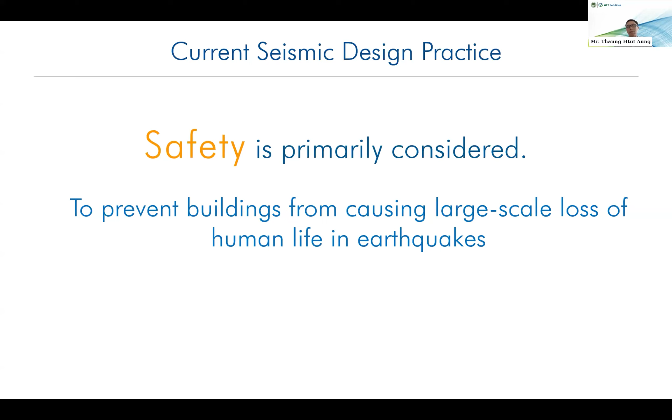In the current seismic design approaches, we consider public safety as a primary consideration. When we design the buildings, for normal buildings, we design them to remain elastic or have very little damage under frequent earthquakes. But under extreme earthquake, the buildings should not collapse, and we design those buildings to have low probability of collapse under extreme earthquakes. So our primary concern is mainly on safety, but we do not consider the recovery of the functionality of the building. It is not well addressed.

All of you know two weeks ago there was an earthquake in Myanmar, magnitude 7.7, which is very strong, with very severe damage and casualties in Myanmar. I am from Myanmar. That earthquake also affected the tall buildings in Bangkok. Because of the soft soil basin effect, although the epicenter is about 1,000 kilometers far from Bangkok, we also felt the ground shaking, especially people who stay in tall buildings.

Due to that ground shaking in Bangkok, most of the damages in the tall buildings are not structural damage, but non-structural damage. Very few structural damage in a few buildings, so we can say that most of the buildings are safe. But due to the non-structural damage, major damages are in the partition walls, brick walls, and also damage in the ceiling fall down, and in some buildings, elevators are stopped. So these kinds of damages affect the reoccupancy of the residents.

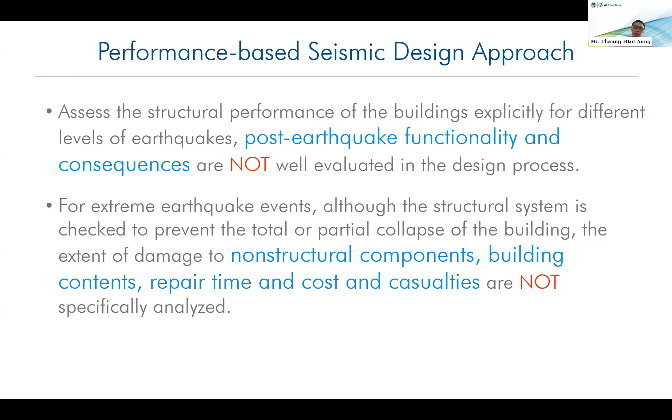In the current performance-based seismic design approach, we check the structural performance of the building explicitly for different levels of earthquakes, like frequent earthquake with a 43-year return period, and maximum considered earthquake with a 2,475-year return period, for different structural performance levels. But the post-earthquake functionality is not well addressed. We check the collapse prevention performance level under extreme earthquakes using nonlinear response history analysis, but damage in the non-structural components, repair time, costs, and casualties are not analyzed.

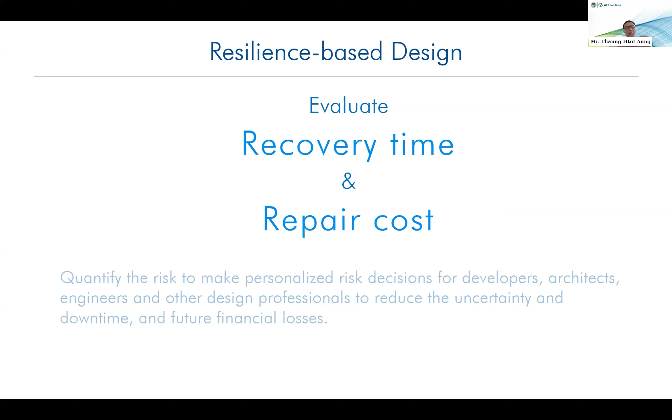So in resilience-based design, we have to evaluate the recovery time and also the repair cost. Based on that assessment, we can quantify the risk in a more detailed manner, and we can make well-informed risk decisions from the different parties: developers, architects, structural consultants, MEP consultants. So all the stakeholders can make decisions based on that information, considering the uncertainty, downtime, and financial losses.

So in this presentation, we will present the process based on the FEMA P58 guidelines. We are focusing on the performance resilience-based assessment of the individual building.

So when we do the seismic design, first we have to define the seismic input. If we do performance-based seismic design, we conduct the site-specific probabilistic seismic hazard assessment by the PSHA consultant, and they provide us the service level earthquake response spectrum information, maximum considered earthquake response spectrum, and ground motions.

So normally for the performance-based seismic design, we conduct the initial elastic design using the wind loading and service level earthquake loading. So in this design stage, we consider the design to remain elastic. So under ultimate wind and service level earthquake, the building will respond essentially elastic.

So in response spectrum analysis, we do not reduce the seismic forces by response modification coefficients, the R factor. We just use the scale factor 9.81 if we use SI units, and conduct the elastic design. After that, we get the reinforcement information for the structural components in the lateral load resisting system, for example vertical reinforcement in the shear walls, longitudinal reinforcement in the beams, coupling beams, and so on.

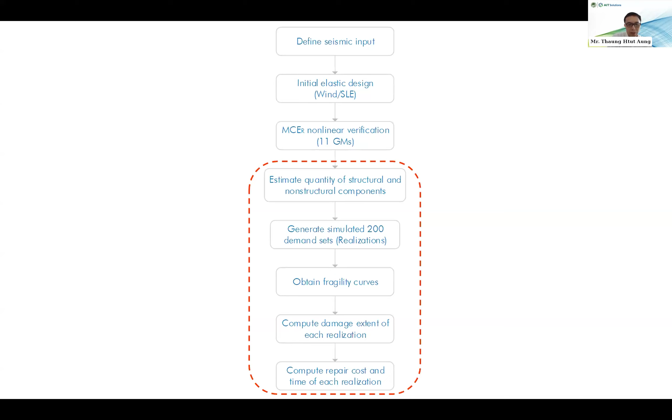Then we have to get the fragility curves of the non-structural components as well as the structural components. Those fragility curves are based on laboratory test results. Then we compute the damage extent of each realization, each ground motion result. Then we compute the repair cost and repair time for each analysis result.

So in the assessment, there are mainly three types. The first one is intensity-based assessment. In that assessment, we evaluate the performance at a selected response spectrum. For example, you want to check the design earthquake response spectrum assessment for the resilience-based assessment, checking the non-structural components damage or structural components damage. So you just use that design earthquake response spectrum as a seismic input and assess the performance.

The second one is scenario-based. That one is based on the user-selected earthquake magnitude and distance. It's like a probabilistic seismic hazard assessment input, so it will consider the uncertainty and intensity of earthquakes around the site. For example, if there are 3-4 active faults near the site, in that case you can consider all the possible scenarios from those faults.

The last one is the time-based assessment, which is the most computationally intensive.

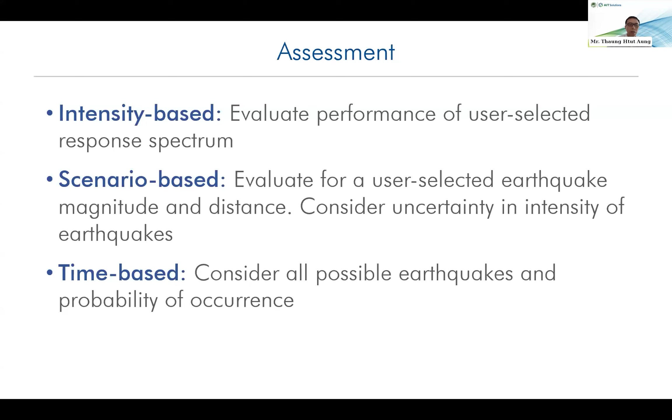This assessment considers all possible earthquakes and their probability of occurrence based on the time you want to consider. For example, if you want to check the performance of the building for 50 years from now, within that 50 years, all possible earthquake scenarios with different intensities and probabilities of occurrence are considered. It will consider 43-year return period, 500-year return period, and so on. So all possible scenarios are considered in the time-based assessment.

So this is just an example. When we assess resilience-based design, we have to consider the structural components - beams, shear walls, columns, slabs. For non-structural components - partition walls, ceilings, piping, HVAC system, fire sprinkler system - and it can also consider casualties. But here I will not focus on casualties. I will focus on the structural and non-structural components.

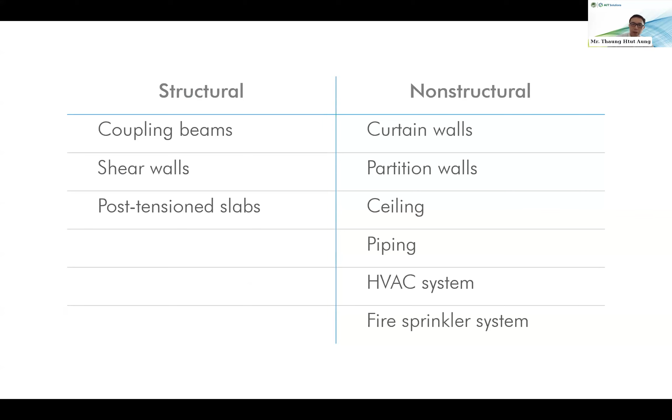So when we do the finite element modeling, if we start with the performance-based assessment, we have to create elastic models for wind and service level earthquake, check the responses, and design the building's initial reinforcement using those wind and SLE earthquake demands. Then we create the nonlinear model using the long reinforcement information, and carry out the time history analysis.

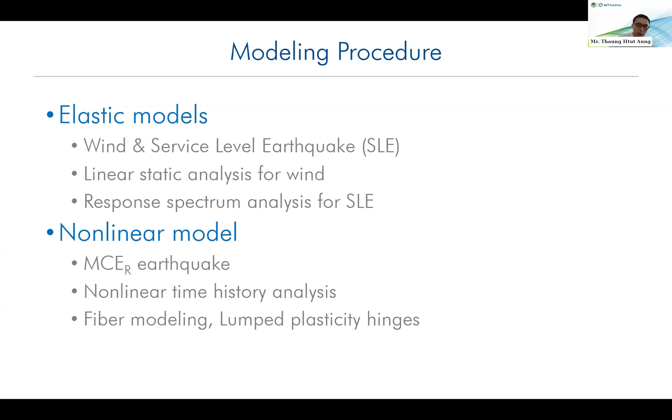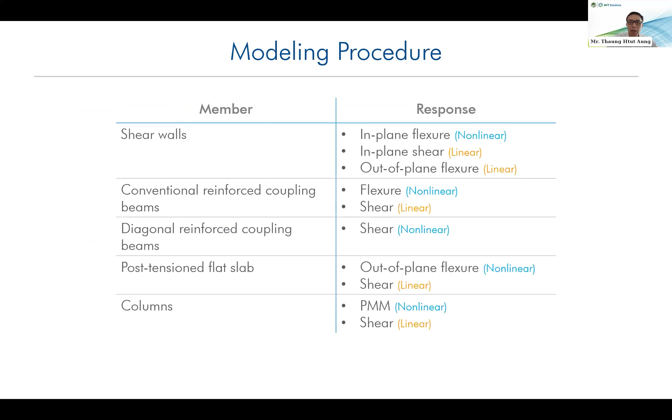So in the modeling, we consider the nonlinear behavior based on the actions. If it is a deformation-controlled action like ductile response, we consider it as nonlinear. But for brittle failures, we consider it as force-controlled and treat it as linear.

After that, we analyze the building for 11 ground motions and check the global responses and the local responses. So in terms of non-structural assessment, the global responses like story drifts and accelerations are important.

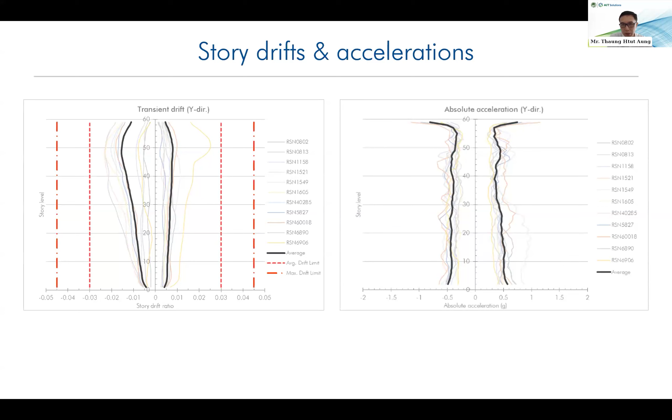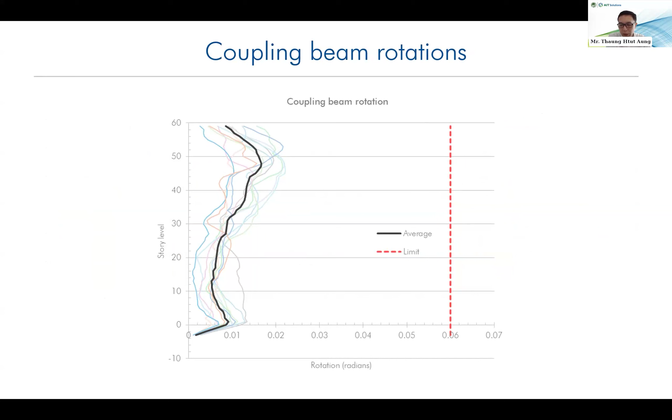Here are the local responses for the coupling beam rotation, one coupling beam rotation along the height. They are still within the limit of the collapse prevention performance level, but we cannot assess the damage from this.

So to check the structural and non-structural damages, we have to generate the realization demand sets from those 11 ground motions. We create 200 simulated demand sets. For example, we have the rotation of our coupling beam at level 22. We have 11 ground motion sets, so there will be 11 dots here. But using Monte Carlo simulation, we generate 200 rotation results without running the nonlinear time history analysis.

So we plot the rotation results of 200 ground motions. The x-axis represents the 200 results, let's say 200 ground motions, and the y-axis is the rotation results. So it is in the range of 0.01 radian to 0.03 radian.

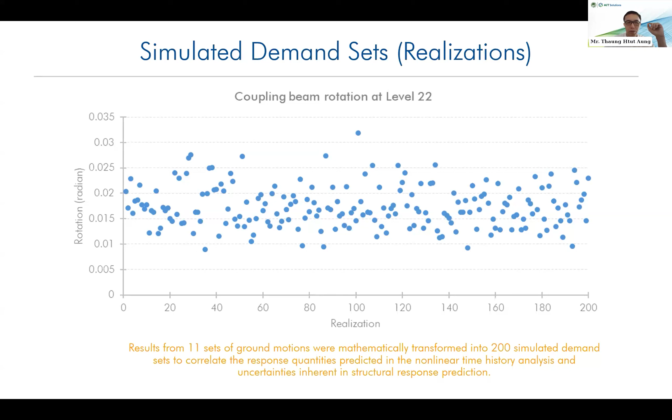Same thing, we have to plot for all other structural and non-structural components, for example shear wall rotation, or slab column connection rotations, and so on.

Then we have to check the damage using the fragility curves. This is one example of the fragility curve for the shear wall. There are other curves for non-structural components like partition walls, gypsum walls, and so on, so you have to use the corresponding fragility curve for that non-structural component.

Fragility curves show the probability of damage for the component with respect to the demand parameter. It may be the drift or it may be the acceleration.

For example, in this fragility curve for the shear wall, the x-axis is the story drift and the y-axis is the probability of damage. There are three types of damage state. Damage state 1 is just spalling of cover. Damage state 2 is larger, exposed longitudinal reinforcing. Damage state 3 is core concrete damage.

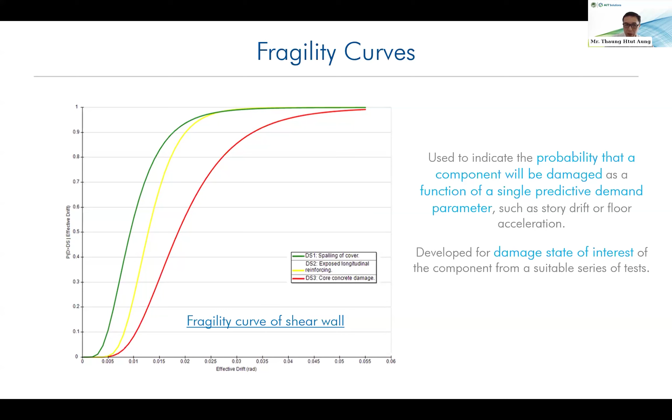So these three curves can be obtained from laboratory test results.

Then we have to check the damage assessment of each structural and non-structural component for each realization. So if we have one partition wall, we check its damage, for example based on the story drift at level 25. So we extract the story drift at level 25 for 200 realizations, and for each realization we check what the damage level is.

So we generate the realization using Monte Carlo simulation, and then we do random number generation using numbers between 1 and 100 to check the damage state.

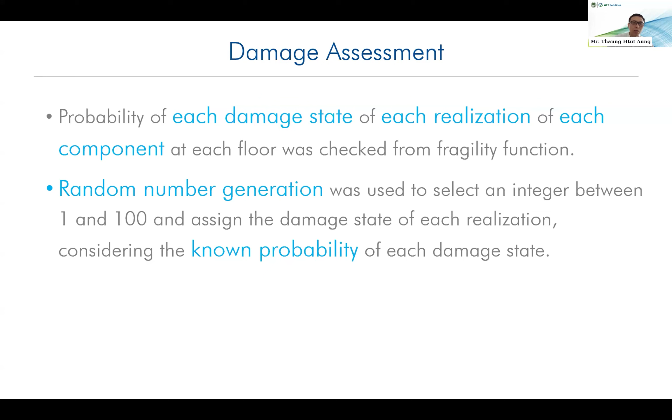So from the fragility curve we will know the probability. Here is the process: for example for the wall, we have 3 damage states. If the rotation of the wall, or for the partition wall the story drift ratio, is 0.01, we have to use that story drift ratio.

And the realization number is, let's say, 34 out of 200. So for that ratio, we check the probability. For damage state 1, the green one, the probability is 0.54. For damage state 2, the probability is 0.23 at the 0.01 ratio. And damage state 3 is 0.08.

So occurring of damage state 1 is 0.54 in this table, and occurring of damage state 2 is 0.23. So not occurring of damage state 1 is 1 minus 0.54, which is 0.46. Not occurring of damage state 2 is 1 minus 0.23, which is 0.77. And not occurring of damage state 3 is 1 minus 0.08, which is 0.92.

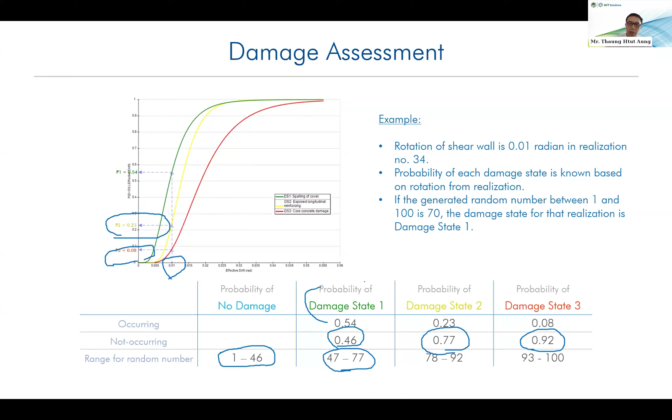So we have to check all the structural and non-structural components using that procedure. Then we have to calculate the repair cost, which again requires checking each realization and each damaged component.

Normally, repair costs are calculated as cost per unit of repair, using lower bound and upper bound quantities. If fewer quantities of components are damaged in the realization, the median repair cost will be high, similar to buying in bulk reducing the price, but buying few things increases the price. Based on that, we decide the median repair cost.

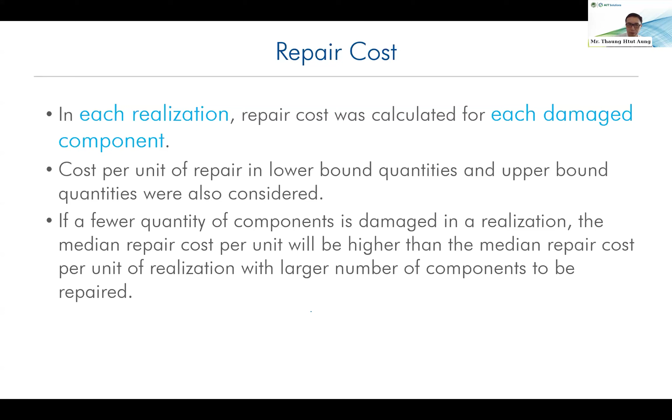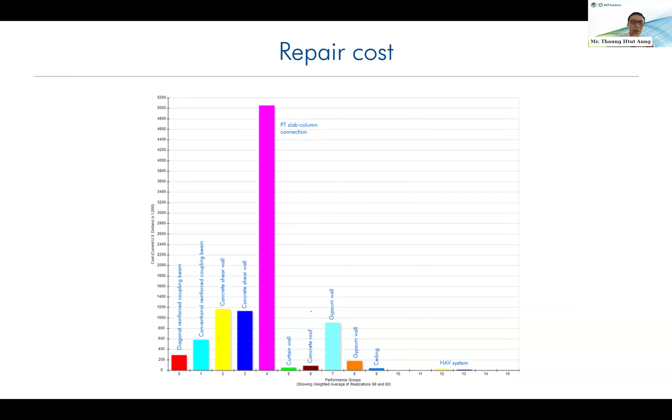Here, diagonal reinforced concrete coupling beams have a repair cost of about 200,000 US dollars, and so on. For the non-structural components in this assessment, the damage repair cost is less, but gypsum wall damage is also high. Then you can plot the repair cost in terms of realization, where the x-axis is the number of realizations up to 200, and the y-axis is the total repair cost.

So the total repair cost for the median, the 50% probability of exceedance in this building is about 9.5 million US dollars if we check at the 100 realization. So we can also see which group is contributing larger repair cost.

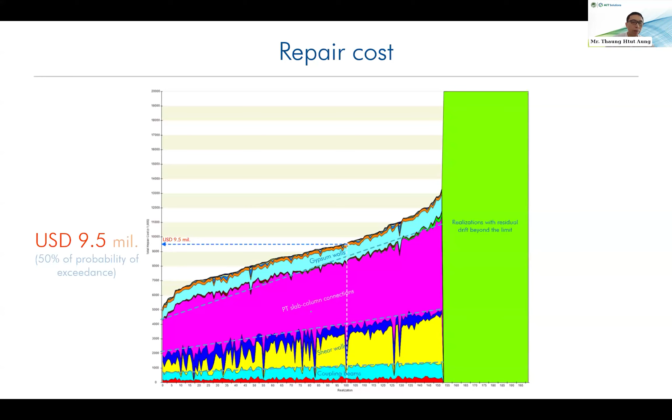But here you can see on the right side, there's a green area with realizations with residual drift beyond the limit. If the residual drift, the permanent drift of the building in those realizations are beyond the limit, we will not calculate the repair cost.

And also we have to calculate the repair time. Normally repair time in FEMA P58 procedure considers the labor factor. For example, labor factor is 80% of the total repair cost. So if repair cost is $100, the labor cost will be $80, based on that repair cost.

And then we have the labor rate. For example, labor rate is $50 per day or something like that. So the total repair cost is, let's say, $100,000. And from that $100,000, 80% is the labor cost. In that case, $80,000 will be the labor cost.

If we know the labor rate is $50 per day, we can calculate the total number of labor workers needed. Then we estimate how many people can accommodate in that building during the repair. For example, 100 laborers can accommodate, then we divide by the total number. In that case, we can calculate the total repair time to repair that building.

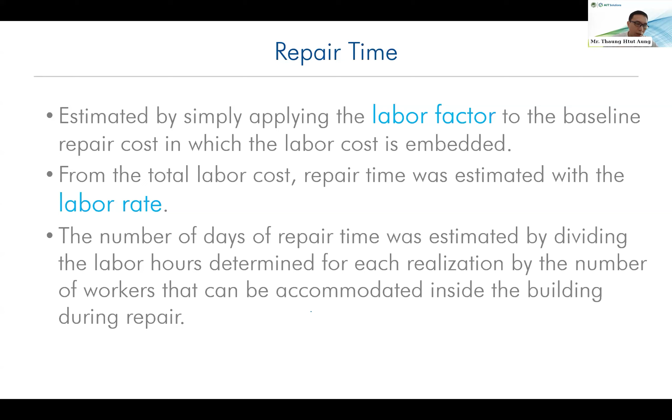Same thing for the fragility curves. Fragility curves that we get from the FEMA website are based on US standards and research. So if we have the fragility curve for the brick walls or partition walls based on local practice, it will be good to assess the damage.

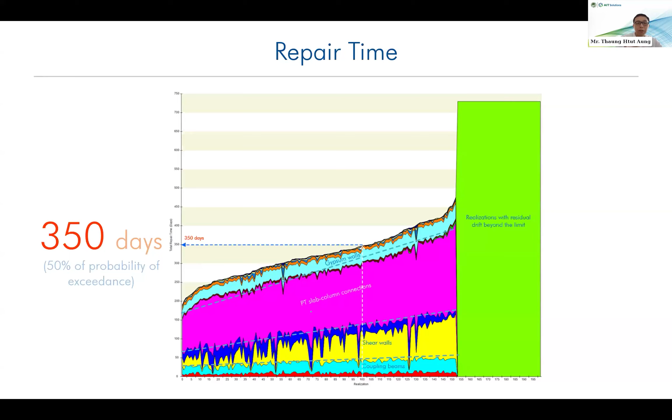So here is the repair time assessment. For this building, the repair time is about 1 year, which is at 50% probability of exceedance.

So the procedure that I presented is for individual building assessment. But in the future, the trend is codes are going toward community resilience, not only individual building resilience. They will consider the cluster of buildings, city level, and consider other infrastructure and lifeline systems.

So all the things will be considered in a holistic approach to check the resiliency. Those procedures are not mentioned in the building codes, but there are manuals of practice and guidelines in ASCE. So here are good MOPs and guidelines if you want to read more details.

So that's all for my part. My colleague Shabil will explain further detail about the time-based assessment, which is the most extensive process.

As Mr. Aung mentioned in his presentation, what we did was look at an individual building, and as Mr. Aung described, we look at a particular intensity for that building, an MCE level, for example, earthquake. And we ran 11 ground motions, got the local and global responses.

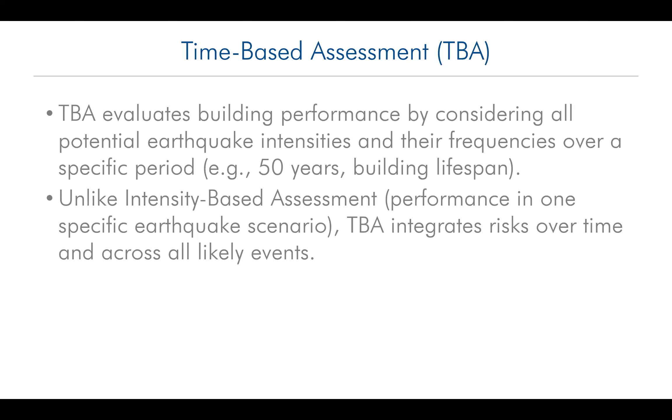Unlike a single event, now we are running the same approach, the P58 approach, but for different intensities. Why do we need to run this for different intensities? The reason is that we can now combine the information we're getting from all of those intensities and get different parameters, which will help the owners as well as insurance companies make financial decisions.

One of the key parameters which helps us make those decisions is what we call the average annual loss. Another key parameter is what we call the net present value. The slide in front of you is summarizing the time-based assessment process. It's exactly the same process as Mr. Aung defined in his part, but we just repeat it for multiple levels of intensities.

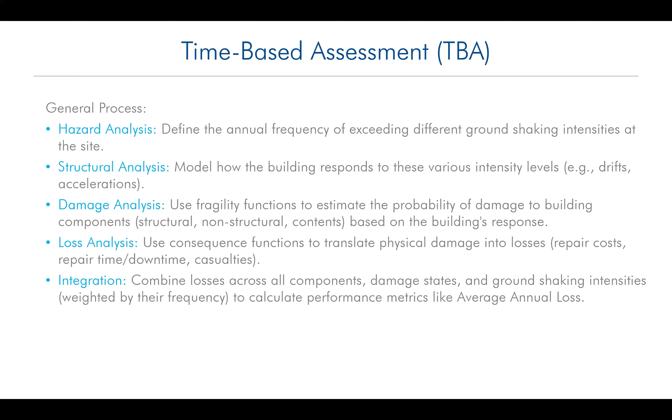For each level of intensity, we have a median cost associated, which has a 50% probability of exceedance if that event were to occur. Now, if we integrate all of those costs, we get what we call an average annual loss. What is that average annual loss? It's how much money, for example if I am an owner of a building, I'm expected to pay every year if earthquakes occur over the next 50 years.

How do we calculate that? Imagine you have a structure whose lifespan is 50 years. Every year there can be one or more earthquakes, but you just note down how much money you spent that year to repair your structure. Then you average it out for 50 years, and you'll know your average annual cost — you're averaging the cost you're paying to repair the structure every year.

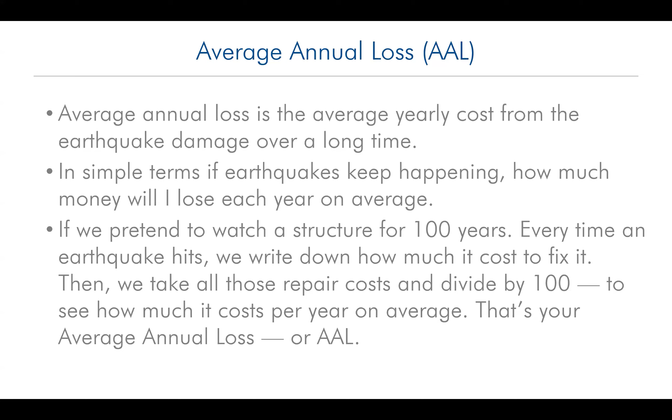This information you'll be able to get from the time-based assessment, because now we're not looking at a single intensity, but at a range of different intensities that might occur during the lifespan of a structure. Now you might ask, well, I know this average annual loss, it's a value, but how do I use it? What do I use it for?

Before I explain where you use it — the way you calculate this average annual loss is basically you sum up the median loss value, the cost you're expected to pay for different intensities of earthquake, and multiply that with the annual frequency of occurrence of that intensity of earthquake. Then you sum that value up, and you get your average annual loss.

So then how do you use that average annual loss? Imagine you're an insurance company and you want to know how much to charge the owner of a building for insurance premium to insure his structure against earthquake. If you know the average annual loss cost, you know how much you're expected to pay every year. The earthquake might not occur every year, but you're expected to pay that cost averaging out over, let's say, the next 50 years.

So if that is the cost, the insurance company has a base now. The insurance company knows most probably this is the amount I'm expected to pay every year for the next 50 years. And I'm going to charge the owner of the building more than the average annual loss. Why? Because the insurance company also has to cover its own expenses. They have staff they have to pay salaries for, and obviously they need profit margins and stuff like that.

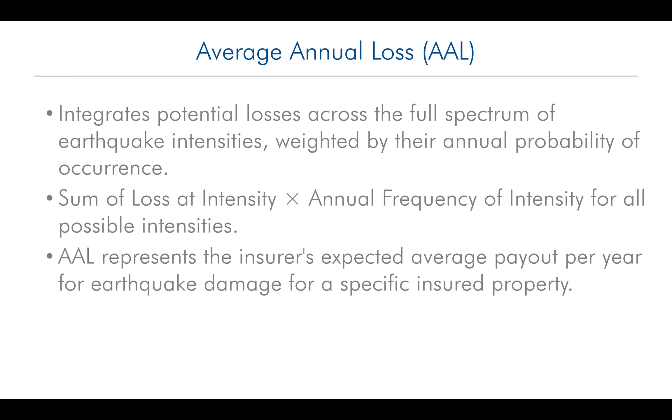And when you run the resilience-based design procedure, you actually know what kind of cost you're expecting to pay. You might also see how much the insurance company is charging you, and make your decision whether you want to buy that insurance or not, or whether that insurance is good enough, or whether you may be better off just paying for the repairs yourself. So this is very good information that owners as well as insurance companies can use to make informed financial decisions.

Another very important piece of information, especially for people looking to retrofit their buildings, is what we call the net present value. So what is net present value? Net present value basically is the total amount of money you are going to pay for a future period, let's say 30 years, 50 years, for repairing after an earthquake. So average annual loss is what you're paying annually on average, but net present value is the total money you're expected to pay over the next 30 to 50 years.

But net present value does not only consider the repair and replacement costs. Net present value also considers the downtime cost. So if you have a structure which is generating you income, because your structure is going to close down, you're losing that income also. And net present value actually considers that cost as well.

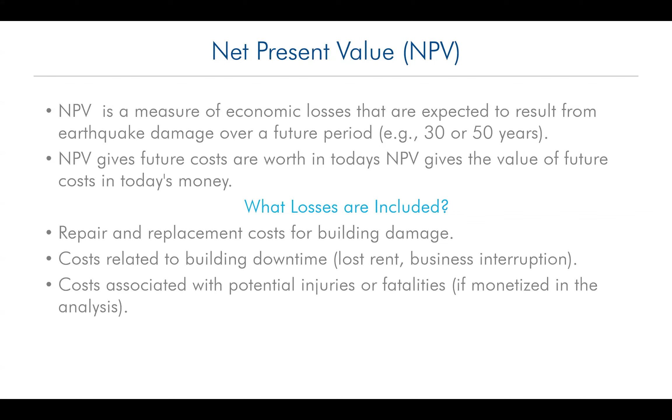Now, net present value actually converts the future costs into today's money. So what do we mean by that? Well, let's say you have a certain amount of money today, and you might want to invest that money and get some profit from somewhere, let's say 5%, 10% profit. Now, if you're saving that money to pay in the future, that money would be worth less, because if you invest it today, your money will return you something and you'll have more money. So net present value converts the future cost to the cost of today, and it uses what we call the discount rate to do that conversion.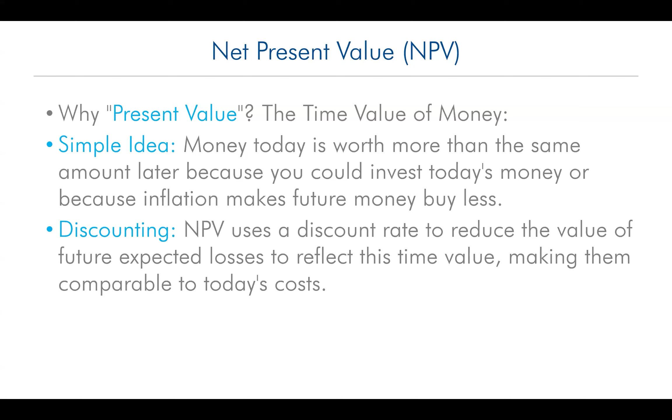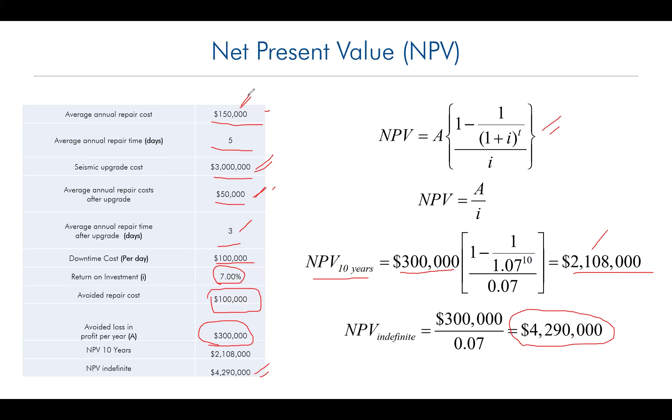So let me just close the annotation and then continue. Okay, so let me just...

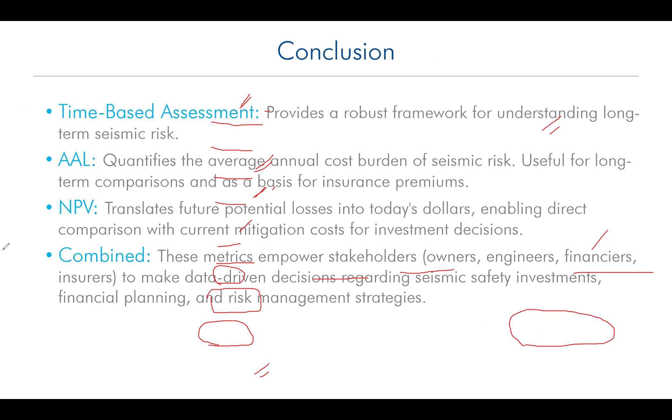So then, just to conclude: the time-based assessment is a framework where we are not looking at a single intensity, but multiple intensities, and then we can make decisions about the structures and the costs associated with earthquake repairs. We are not looking at a single event, but multiple events. And we can use quantities like average annual loss and net present values.

And then these parameters can help us make sound financial decisions based on the information coming from our structure. You can see that the entire thing is based on the mathematical model that we created, and also the results that we got from that mathematical model. So we are not just randomly simulating or generating realizations, or what we call events.

Those realizations actually get their information from whatever we provided to the procedure initially, based on our results from the nonlinear model. So the framework as a whole is empowering the owners, as well as the people who have a stake in the structure, to make informed decisions.

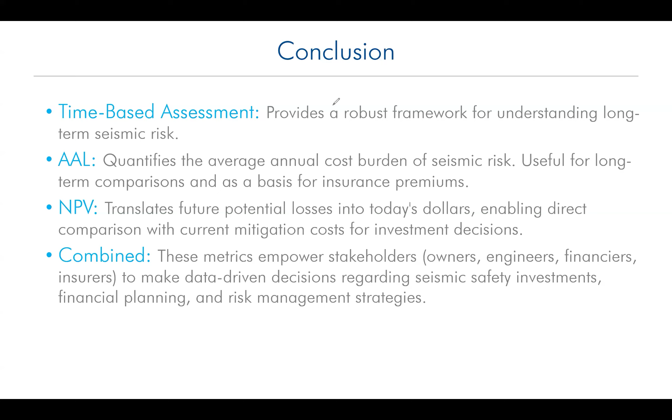So you might want to invest a bit of money today to avoid huge future costs as well. The procedure itself is very good because it relies on the information provided by us from the nonlinear model, which is the same information we use to make the design decisions for performance-based design anyway.